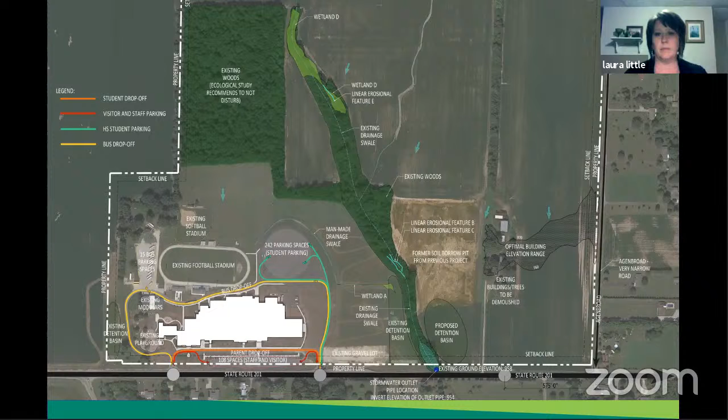I thought one plus of moving it back was that even if the water and sewer costs more, and I know it will, that would help with the stadium costs because OFCC would co-fund some of that water and sewer and it could be tapped into for the stadium. That was part of the discussion. I don't remember ruling it out, but we are going to be tapping into it.

Sorry, Laura, you kind of cut out there. Sorry, we are going to be tapping into those utilities for the stadium. The sanitary that we're taking across, we would be tapping into that as well.

If memory serves me right, it's about $200,000 more to go farther down. Yes, I think you're right, which we don't have.

Any other facility committee members have comments or questions, thoughts on a couple of the options?

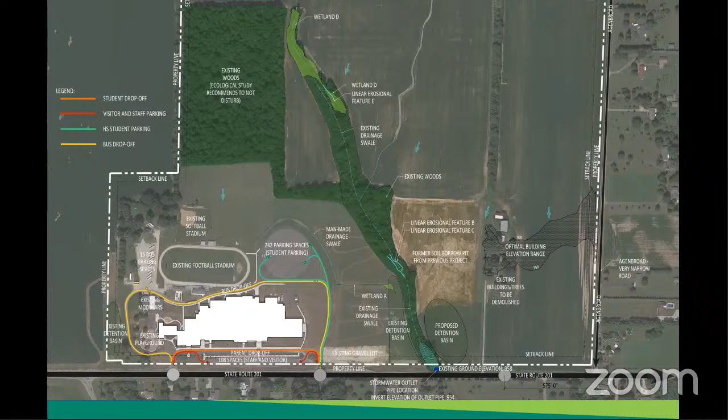It's not practical for the reason why we said to put it this way. To me, looking at it, I really like the previous proposals we were looking at a long time ago, not with Garmann Miller, but even if the building was turned at an angle, that would allow it to sit right along the stadium and still fulfill some of the different needs. But that's just a guess. Thank you.

Do you have, and this sounds ridiculous even saying it out loud, is there an overlay where you'd show the optimal location underneath where you've laid this building? Do you see what I'm saying? Where in frame one you had the optimal location and elevation, and then a second frame showing where you put the building in that spot. Do you have anywhere those are put together so we can see? I think not for today, but we could easily do that.

I think that visually helps, because the elevation changes are a significant issue here, since all that fill and everything is going to make everything a lot more unstable in the first place. And you don't know how much fill it's going to take. How much elevation change are we talking about, I guess is my question.

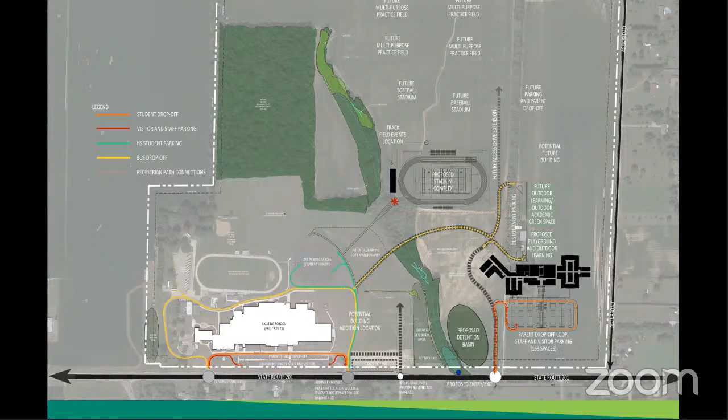I think we need to make a decision. Getting the early site package out in May is going to be the biggest cost savings we can do. I'll reiterate what the architect said in November and December: if we can get this started, we will save money over the cost of the project to the tune of 8%. That's a lot of money, not to mention the deadlines. We need this space in a couple more years, two years. We don't have the luxury of having three or four years to build it. So I am good with this. It may not be perfect, but I trust the architects, I trust Garmann Miller, and I think this has been thought through. This is not a surprise. So let's go for it.

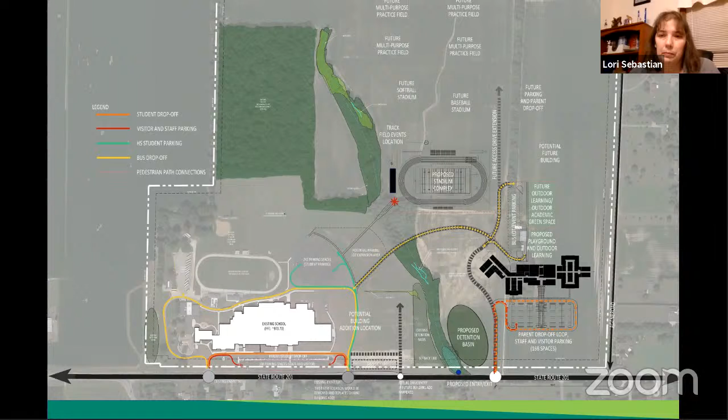Oh, maybe not. My computer just locked up.

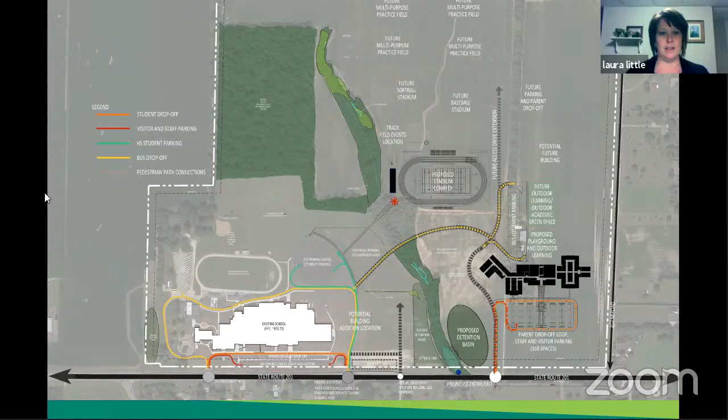So to show everybody, if you haven't already seen it, this is the latest version of the football stadium from the meeting that we had in December. It was asked to orient the entrance to the southeast, and also to have an entrance to the northeast from the bus lot area, where you could have an ambulance come onto the field or into the stadium, or your players coming in from that north side. And then we've got the locker rooms, training room, restroom on the south end with a ticket booth as well, and then a large grand entry as well from that end.

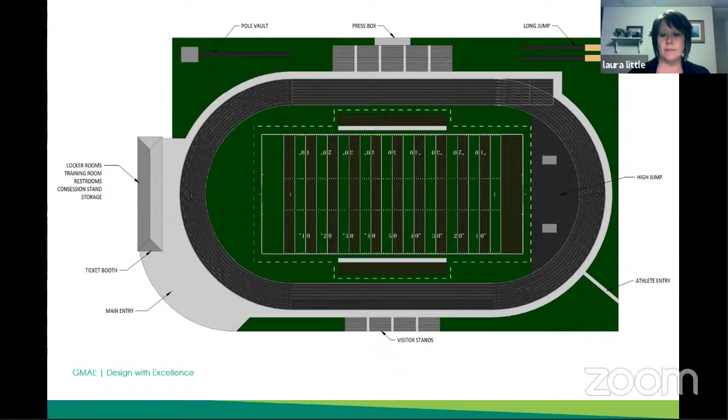Let's see, can I fill in some gaps as well? Yeah, real quick, I'll keep this brief. We put together, for transparency's sake, a committee for the athletic facility made up of a few members, a couple of board members, Mr. Elo and Mrs. Mansfield. We had our athletic director on there, Mr. Smith, Mr. Bird was on there as maintenance, myself as superintendent, and Mr. Hattery served as well.

Garmann Miller actually proposed four different renderings. After our discussions here in the media center, we collectively met after the meeting and talked a little bit about the cost of having potentially two buildings, the location of where we thought the majority of people were going to be parking, which was our high school lot, but also having an entranceway and walkway for buses and student athletes and coaches to the north as well.

So we went back to Garmann Miller and were able to provide the site layout as you see now, and Garmann Miller was great as far as working with us, getting us back a design that talked about what we wanted as far as the building: one single building located on the east side with a ticket booth attached to save costs, a nice entryway up from the lot through the wooded area, but also a separate entranceway for our buses, visitors, and officials that will park probably in that school lot, while having our home side with the sun at their back and the visitors with the sun in their face. Thanks, Laura.

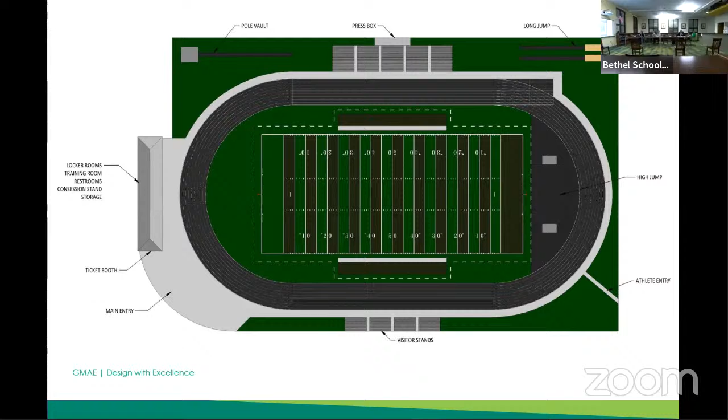So next steps: we're going to continue developing the floor plans, start taking that 2D image and bringing it up, start looking at some elevations. We're going to continue working on the site plan, get those soil borings, get the locations for those as well, and work towards that schematic design submission on February 25th. Once we submit the schematic design documents, Peterson's going to do an estimate for the project, where we can take a look at that, make sure we're on budget, and move forward.